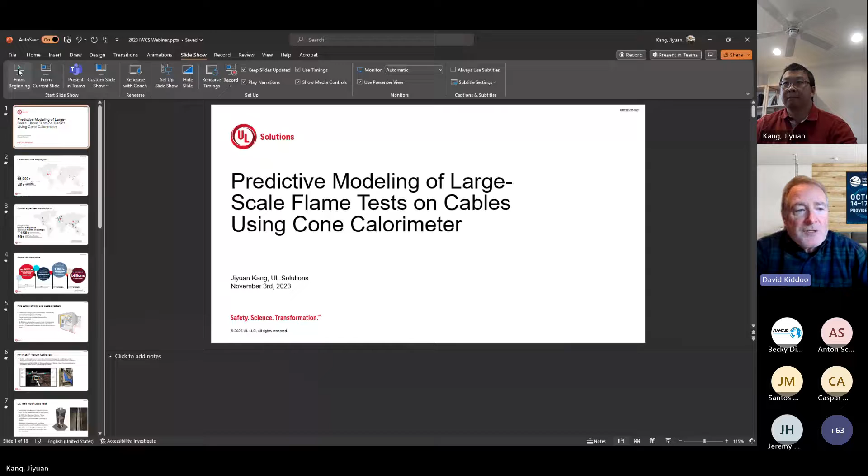Dr. Kang is a fire scientist working in the field of fire protection for wire and cable products. He earned his PhD in mechanical engineering at Case Western Reserve University, with his research interests focused on combustion and fire science. He is a senior staff engineer at the Engineered Materials Operating Unit at UL Solutions, and he has published articles in Fire Technology and Journal of Fire Science, and he is based out of UL Solutions headquarters in Northbrook, Illinois. So welcome, Dr. Kang, and look forward to your presentation.

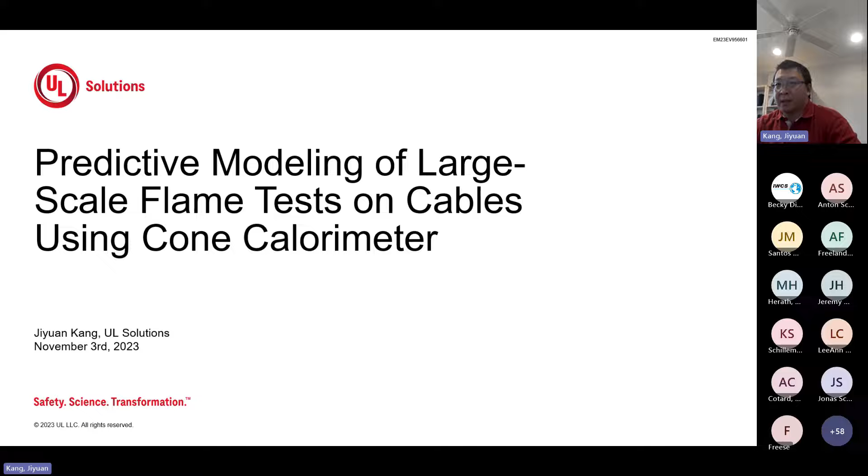My name is Jiyuan Kang. I'm working for UL Solutions, reporting to Engineered Materials. Like Dave said, I'm located at UL headquarters in Northbrook, Illinois. So today's presentation is about predictive modeling of large-scale flame tests on cables using the cone calorimeter.

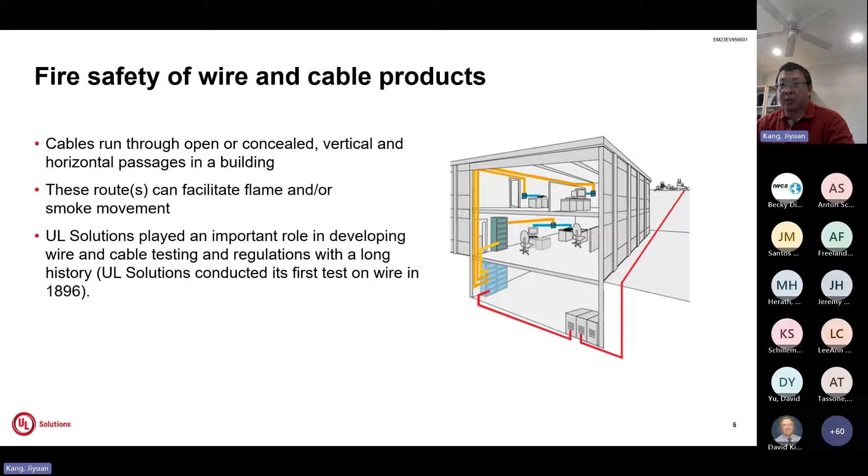So first, let's talk about the large-scale tests. At UL, we do tests following the NFPA 262 standard. It's also called the plenum cable test. The test is designed for cables run through open or concealed horizontal passages in a building and requires that the cable must be designed to meet rigorous requirements for fire resistance and limited smoke production.

From this test, we measure the flame propagation distance in the horizontal direction, and we also measure the AOD, which is average optical density, representing the average smoke release, as well as the POD, which is the peak optical density, representing the peak smoke release.

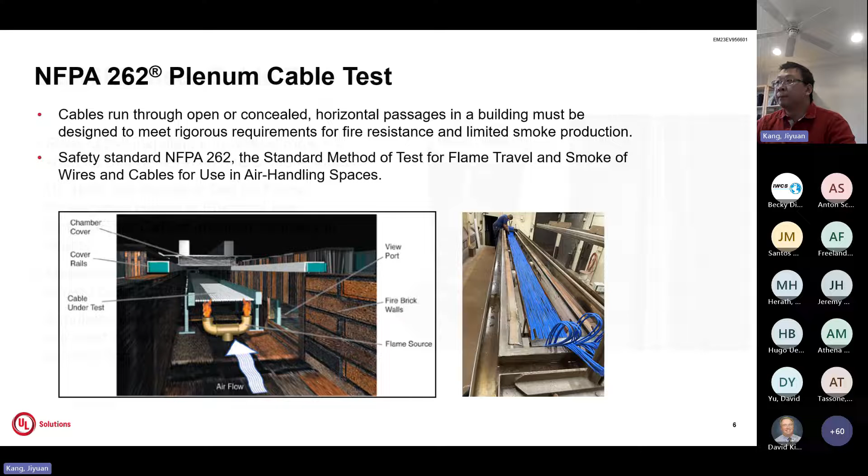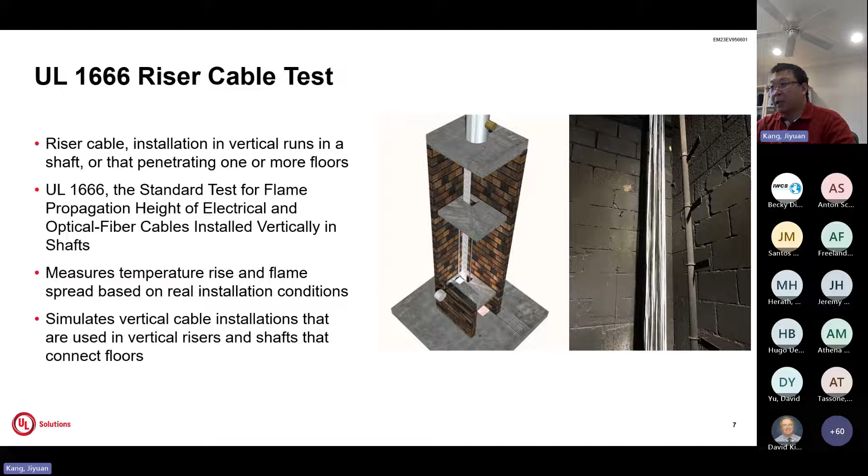The third test we are going to talk about is the EN50399, the common test method for cables under fire conditions. The test is under EU Regulation 305/2011. It is called Harmonized Conditions for the Marketing of Construction Products. This regulation is applicable for all building products, including cables, made available or offered to the marketplace for permanent installation in buildings and civil engineering projects.

During the test, the burner will trigger an ignition on the cable and allow the fire to propagate in the vertical direction. The combusted gas will be directed through a laser-based smoke measurement system and will reach a gas analyzer. The laser system will measure the smoke production rate as well as the total smoke production. The gas analyzer will measure the heat release rate as well as the total heat release.

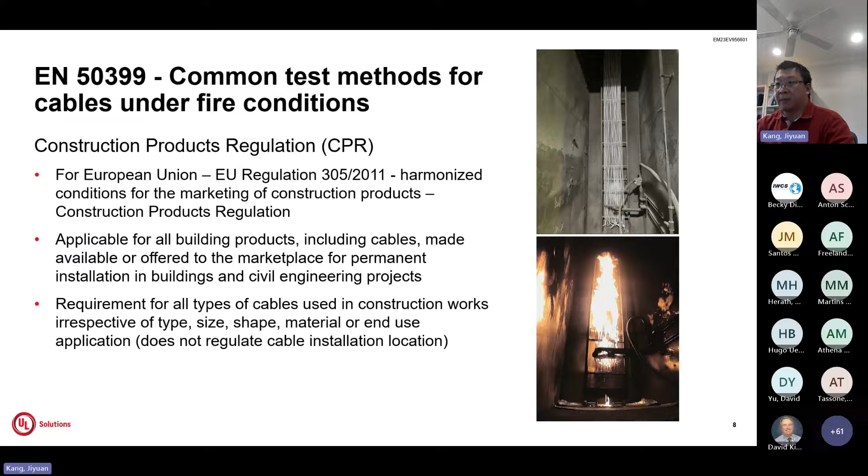So that's all for the large-scale fire tests. In this work, we test samples collected from large-scale fire tests under the cone calorimeter. The cone calorimeter is a small-scale test apparatus used to determine the material ignitability, heat release rates, mass loss rates, effective heat of combustion, and visible smoke.

The device setup and test method are specified in the standard ASTM E1354. UL Solutions actually has a long history of using a cone calorimeter to analyze short lengths of cables and determine their fire characteristics.

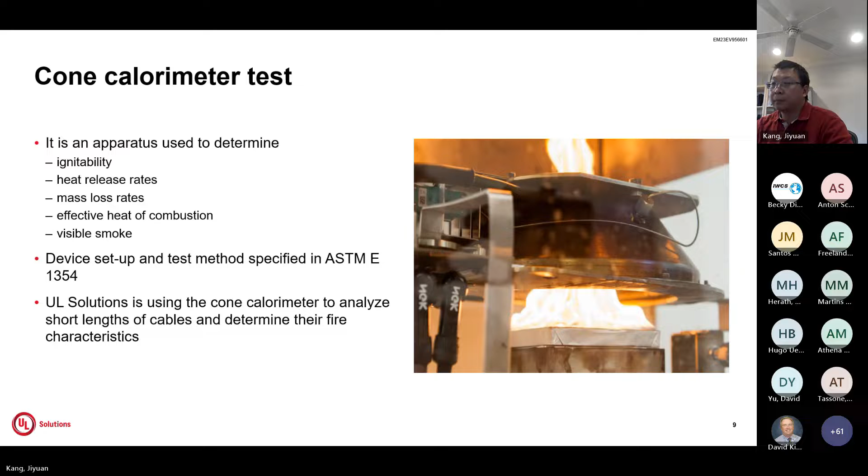So with our long history working on both large-scale flame test and small-scale cone test, we figured that if we can predict the large-scale flame performance based on the fire characteristics collected from small-scale cone test, there will be a lot of benefits. For example, for the cone test UL Solutions is only charging about 2/3 of doing a large-scale flame test. The lead time is only half of the large-scale test, while doing a cone test will only require about 20 feet of the cable sample, in comparison with hundreds or even thousands of feet of the sample required by doing a large-scale flame test.

So we developed the predictive model based on small-scale tests only. I will start to go through details of model development right after this slide, but as a result, we found the model accuracy is fairly high, although not 100% perfect. That's why the model is currently used for assisting research and development. It's not for certification use.

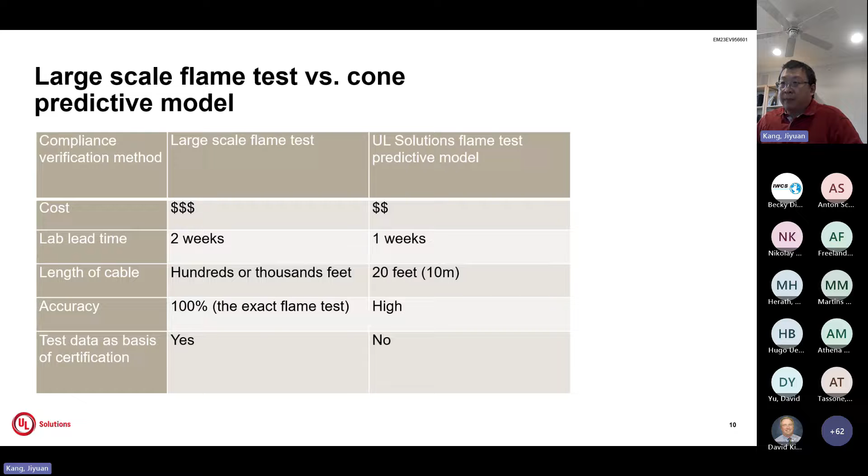So in order to develop the model, we subject cable samples to both large-scale and small-scale tests. For the cone calorimeter test, we collect the heat release history, the smoke generation, mass consumption, and we pack this data together as product flammability character data. And then we correlate this data with the large-scale test result of the same product. The basic principle for developing a model is to train the computer to learn this correlation. Then, when it sees a new small-scale data point, it will compare it with its knowledge base and estimate what the large-scale test result can be.

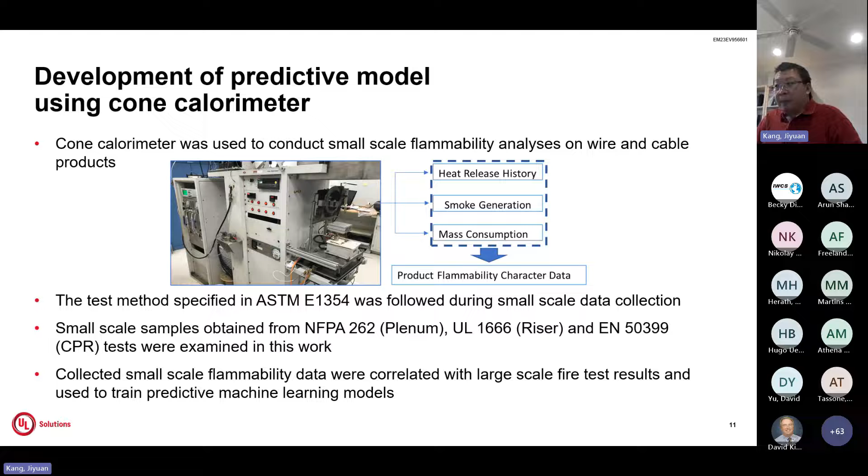For riser and EN50399 samples, we have to treat them differently, because if you remember, the cable will hang in the vertical direction in the large-scale chambers. This gives us very different fire dynamics compared with the horizontal installation. In order to better replicate this fire dynamic, UL Solutions developed a small-scale ladder holder with an open burner installed as the ignition source to test these cables with a cone.

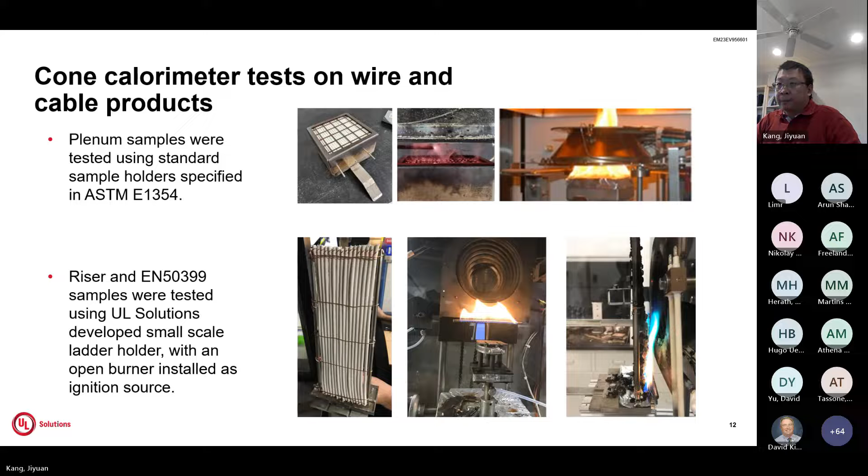So, for the vertical test of the cables, when the cable is burned in the chamber, the upper portion of the cable is receiving heat not only from the burner below it, but also from the cable burning below it. In order to develop a reasonable testing process, we used the riser chamber as a reference and measured the thermal distribution over length for multiple tests. Based on data analysis, we have created a burner and cone heater combination that can simulate the thermal environment that the cable sample actually experiences between 4 to 6 feet inside the riser chamber.

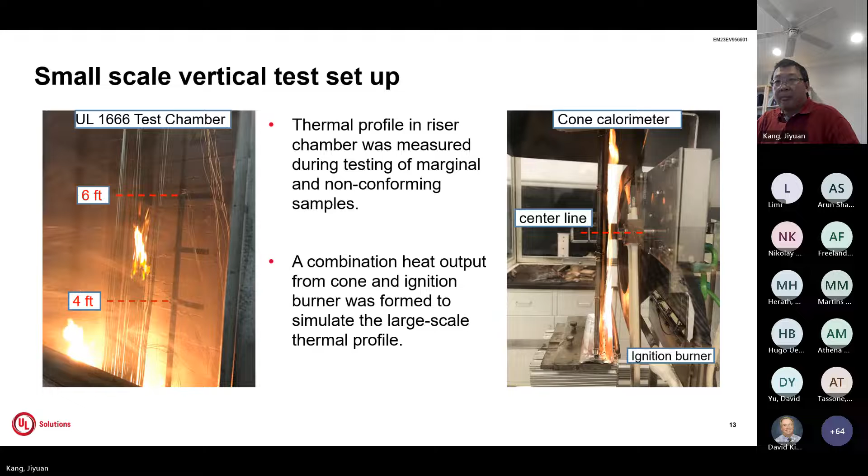We have validated the model using 17 cables purchased in the US market that were self-declared as being plenum cables. This model showed very good performance on predicting the large-scale fire test failures. We conducted the actual large-scale fire test on these cables and confirmed that the model successfully captured all the failures. Because of the machine learning feature, we have the power to continuously educate the model. Hence, UL has been closely monitoring our test records and is collecting any necessary data points to improve the model.

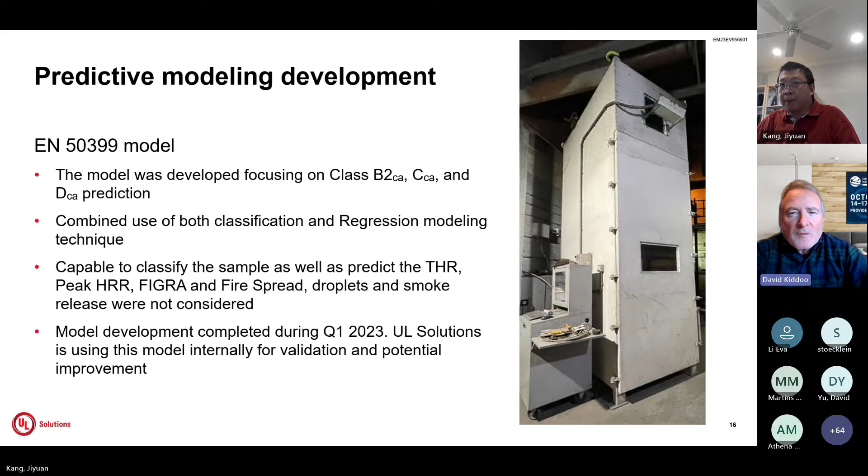Can this model be used by other labs from UL with other chambers, other environments, that kind of thing? So that's really more like a business and commercial discussion with our business team. But please note, I'm from technical side, so I will give technical comment on this question. We are very serious on calibrating our equipment.

For example, the UL Cone Lab is doing C-factor calibration every day, and we were doing the PMMA calibration every day. When we purchase the equipment from the manufacturer, they gave us a specified C-factor range that we should keep the machine to be in a good shape. But we were not really using their range. We were using our range, which is much narrower than the range they gave us. So basically, we spend a lot of effort to make sure our cone is delivering an accurate result.

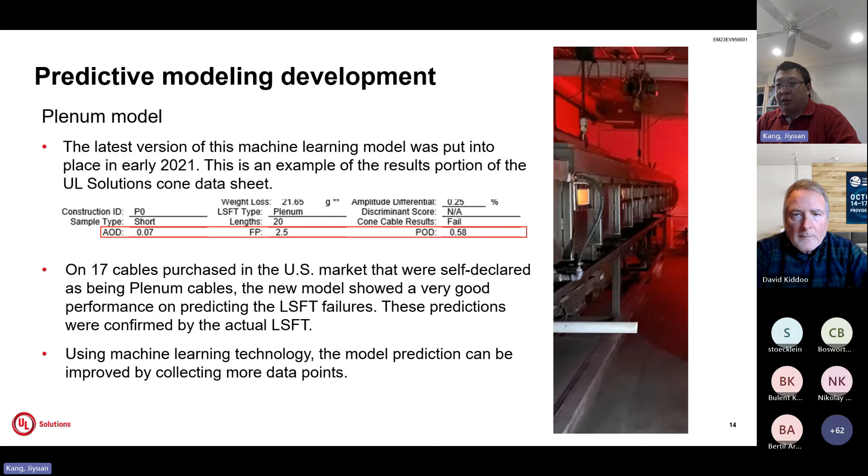But yeah, there is definitely potential to develop a model for plastic plaques or tapes material only. The basic principle is to collect the fire characteristics of the material. It doesn't matter what material we are looking at, and then correlate the data we can collect from the small scale test with the large scale test.

Yeah, and clearly the interactions between the components and the dynamics, like you said, of a full cable design, you really can't have just one component predict the cable performance in total as a full cable unit. Yeah. So it could be good relative testing of materials, but certainly no correlation to the full scale cable fire test.